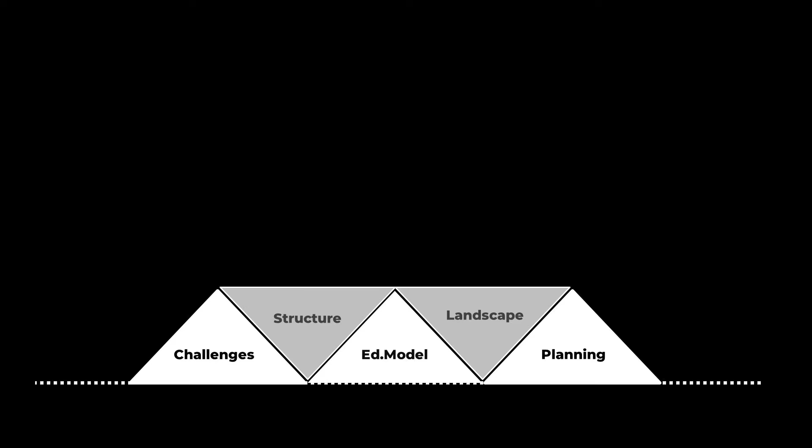Architect Samuel Barclay began with the design of this academy back in the year 2013, and the first building was started in 2015. So now the question lies, what was so special about its educational model and how has architecture contributed to its mission? So in today's case study, we would be focusing on various factors such as the design challenges, its unique educational model, the spatial planning, the structural arrangement, its landscape features, the different materials used, the climatic response, and finally the lessons that we need to learn from this case study. So without any further ado, let's get started.

And now coming to the design brief, which is the most challenging part in case of this design, which included firstly to design a sanctuary for learning. So basically a home away from home for young women from underprivileged households that could enable them to become great leaders. And second part of the brief included the formal requirements, which included a classroom, a library, some laboratories, kitchen and dining facilities, some dormitories, and some administrative offices. And lastly, above all, the major twist to the story lay in creating a cost-effective solution with a limited budget.

So now the most interesting part would be to see how this school has managed to uplift these girls to prepare them for the real world. And before starting on to the actual planning process, let's first understand the vision of the founders of its unique educational model, which has also helped the architect in picking up some nuances, and which was also one of the brilliant moves in involving the architect right from the envisioning phase, so that the client and the architect are in sync right from day one.

So coming to some key comparative points of the traditional model versus the Avasara model. So firstly, when it comes to the traditional educational model, the syllabus is mostly outdated, but in case of Avasara, it is progressive.

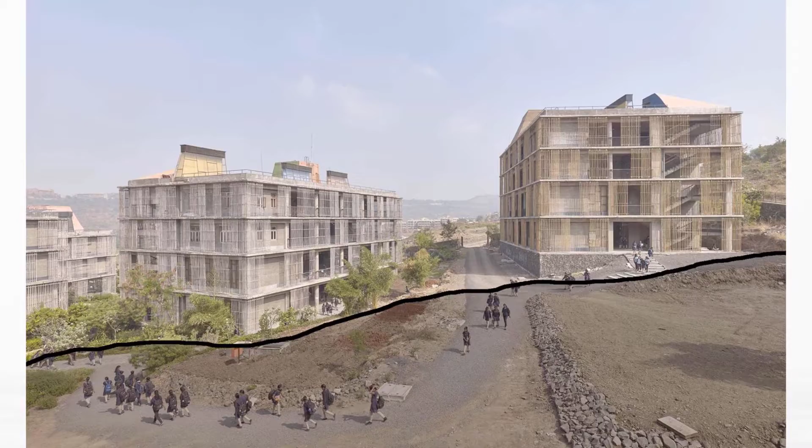And now coming to the planning of this campus. As the site is located in the green and peaceful valley of Lavale near Pune, it measures about 4.3 acres in total area. And the entire site has a total drop of about 18 meters from one end to another. And the entry to the campus is from the north side into a central courtyard formed by the buildings around it.

So in the entire planning of the campus, the two major decisions that have had a profound impact are, firstly, instead of having one large building, the entire campus is broken down into a series of 7 clusters which are arranged in such a fashion which creates a series of informal walkways, pathways, courtyards and gardens between these buildings. And these in-between spaces become spaces for social interaction between the peers, or a space for carrying out rituals or various performances, or merely as a playground or even growing food in the campus.

And the second most important call which was taken is that usually in most of the campuses, the residential zone is separated from the academic zone as it is used only in the night times. But in case of this campus, the residential dormitories are located above the academic function. So in all of the buildings, the lower 2 floors are for classrooms and the upper 2 floors are for dormitories and faculty residences.

And the most significant part about this move is that at any given point, each and every part of the campus is active, unlike the traditional planning where the residential zone is inactive in the daytime and the academic zone is inactive in the night time. And also the greatest intangible advantage about this zoning decision was that it helped in establishing strong bonds between the peers, which was one of the reasons before starting on to design this school.

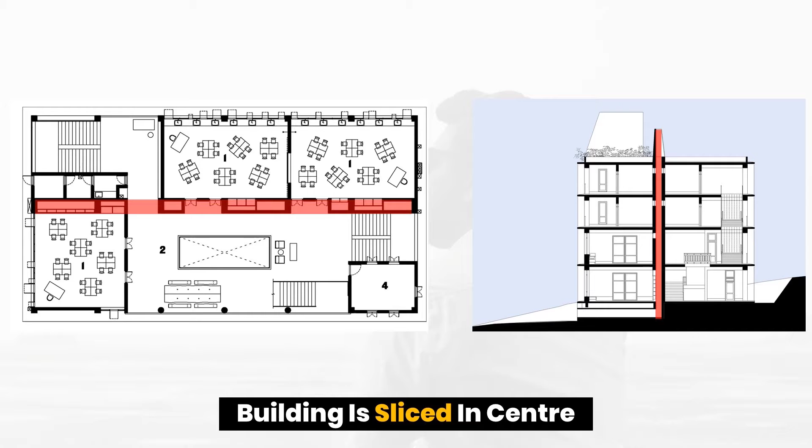And now let's see the micro planning of these buildings where its real simplicity lies. So the building is sliced right in the center to introduce a ventilation shaft that takes in cool air from the hume pipes and circulates it into the classroom to keep the overall environment cool. So the academic floor plate consists of classrooms, administrative offices, washrooms and the large atrium communal space in the center.

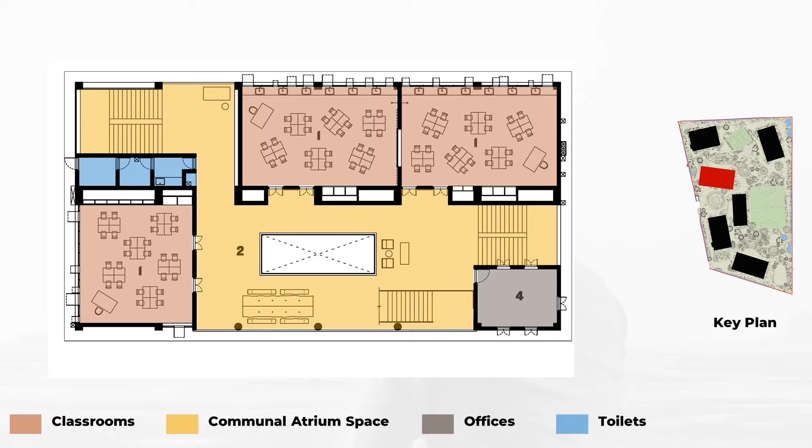So the classrooms are smartly arranged on the periphery to take advantage of the stunning views around, with the central open communal space which is used for informal learning, playing or even carrying out various discussions. And as the lower 2 floors are for academic facilities such as the library, the classroom or even the administrative facilities, the upper 2 floors are for dormitories and faculty residences which are surrounded by verandas on both the sides, which act as a shield against the harsh sun and the rain.

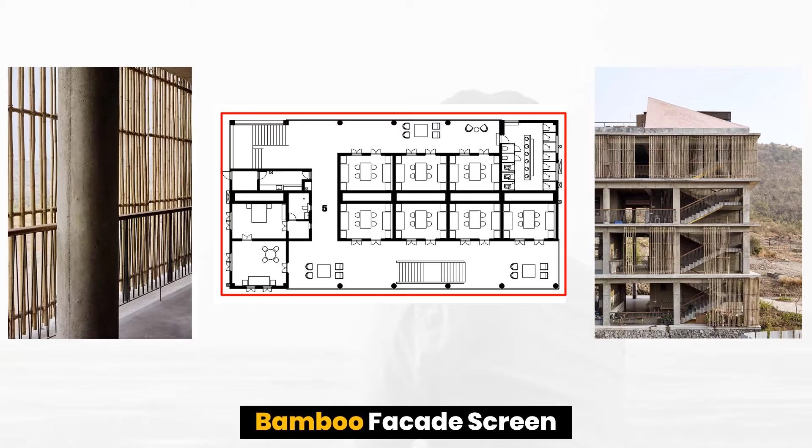So the verandas also act as public spaces for the girls to hang around and enjoy the stunning views of the surroundings or even watch their colleagues from other blocks. Therefore, these public and private spaces collectively intend to give a sense of familiarity and also a sense of intimacy to the young girls living and learning in the campus. And lastly, the entire facade is draped in bamboo screen which is prepared by the local craftsmen, which also protects against the harsh sun.

And also the most distinct feature about these buildings is the vibrant paints as against the muted tones of the bamboo and also the grey concrete for the walls. So the walls in the entire institute remain bare, showing their honest materiality, and only the ceilings are made to stand out by painting them with various vibrant pastel color shades by one of the famous artists, Malene Bach from Copenhagen.

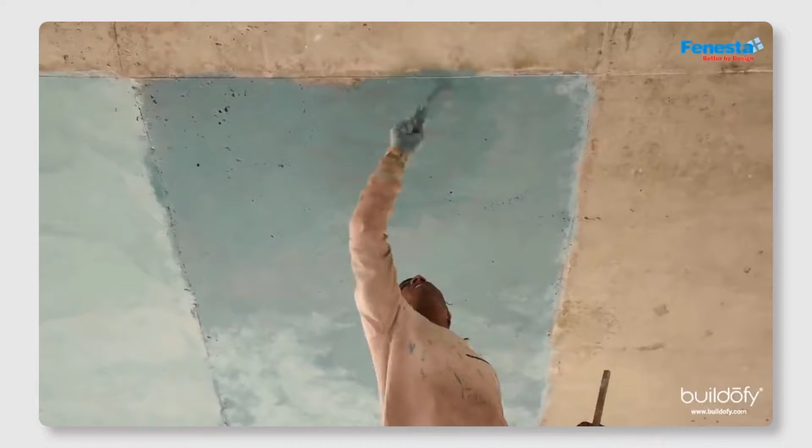So these ceiling colors really add vibrancy and delight to the space, which allows users to associate a space with a color and also acts as a wayfinding device. And now these simple steps taken into consideration during the planning have given rise to some of the amazing planning features that need to be highlighted, that have contributed in making this campus a great learning environment.

And now coming to the first advantage, that is the built versus the circulation ratio. So usually in most of the buildings, the circulation area is not more than 10% of the total area of that floor plate. But in this case, equal weightage is given to the circulation spaces as well as built classroom spaces, because here the circulation spaces are not merely circulation, but they have become social hangout spaces. So due to this move, an equal emphasis is given to learning inside as well as outside the classroom.

And the pockets in between the classrooms, that is the central circulation space, act as a learning space so that when students feel bored in the classroom, they can come out and sit in this space and learn. Therefore, the equal emphasis on the built versus the circulation ratio has really helped in establishing strong bonds between them.

And the second important feature is the building design being simple and identical. It offers enormous advantages such as easy construction, the cost of the construction is in control, there is less wastage of resources, and it also enables maximum flexibility. The quality of the project is controlled, and lastly the speed of construction, which is very crucial for any project.

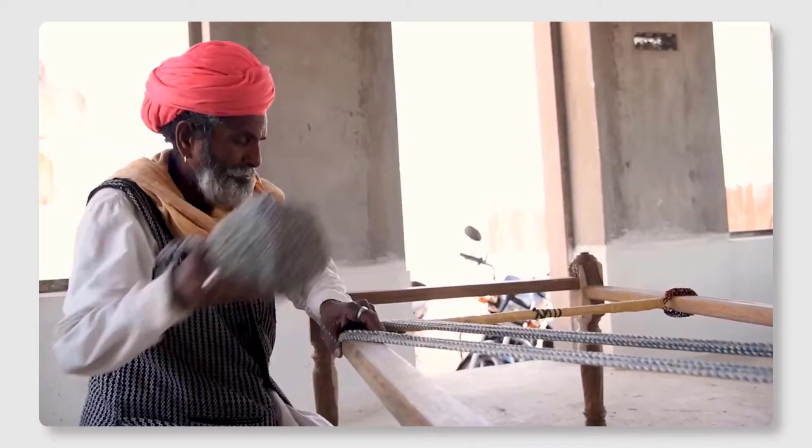And thirdly, the girls are staying away from their home, due to which they may feel homesick. And to address this issue, the materials and also the furniture, such as the old reclaimed wooden batten doors and windows, the mosaic flooring, and especially the charpai, are used to tone down the entire aura and give them a sense of familiarity and comfort, just like their home. So the girls living here do not get the feeling of living in a luxurious contemporary building with air conditioning all over, but the luxury and feel of traditional materials, which is an extension of their home.

And the fourth important feature is that here the staircase is not merely used as circulation but also as a social hangout space. Usually staircases are meant for circulation from one floor to another with a specific width, but in this case the width is slightly increased so that they are not only used for circulation but also become social hangout spaces where girls hang out and even sit around. And also changing the material of the staircase from solid concrete to steel has added lightness to the entire space, and most importantly it allows light to permeate through it.

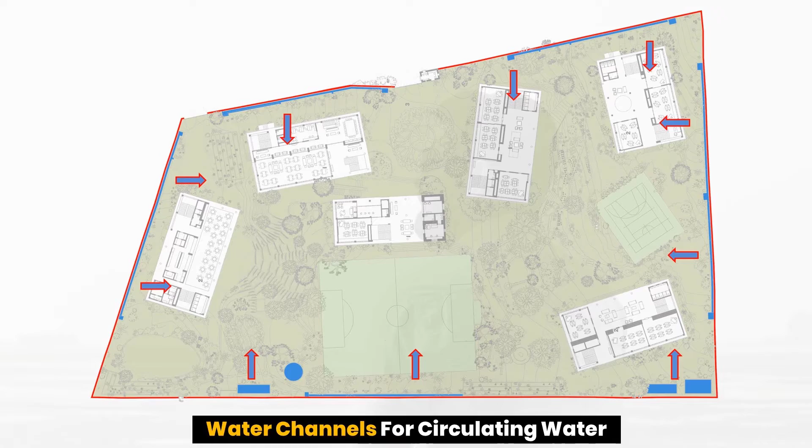Which implies that as the site is sloping, with an 18-meter drop from the higher end to the lower end, the water is collected at the higher end and transported through the entire site by means of channels located on the periphery of the entire landscape. So just by gravity, water is circulated from the higher end to the lower end. These simple steps and also the collaboration with the farmers have really helped them establish sustainability for this project. And this effort resulted in food and vegetables that people could grow and eat in the campus.

And they have also used a simple reed bed filtration system where all the grey water from the showers as well as the toilets gets reused and recycled for the entire landscape. And it goes way further than that, because as they are doing the landscaping work, they are also involving the school students by means of workshops, which teach them lessons of sustainability.

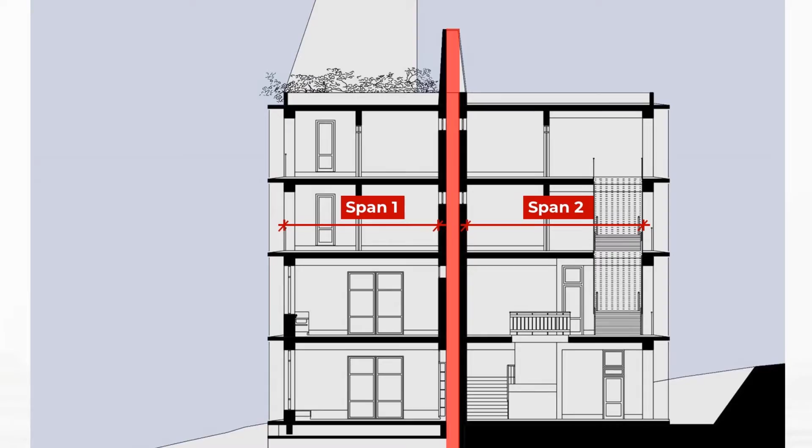And now coming to the structural arrangement of this building. So the real beauty of this building lies in the simplicity of its structure, the way it is articulated with simple reinforced concrete with typical column beam construction and post-tension slabs. And due to the post-tension slabs and most importantly slicing the building right in the center to introduce a central shaft reduces the overall spanning of the building. So therefore we get a clear column-free space, thereby reducing the cost and also the spans of RCC.

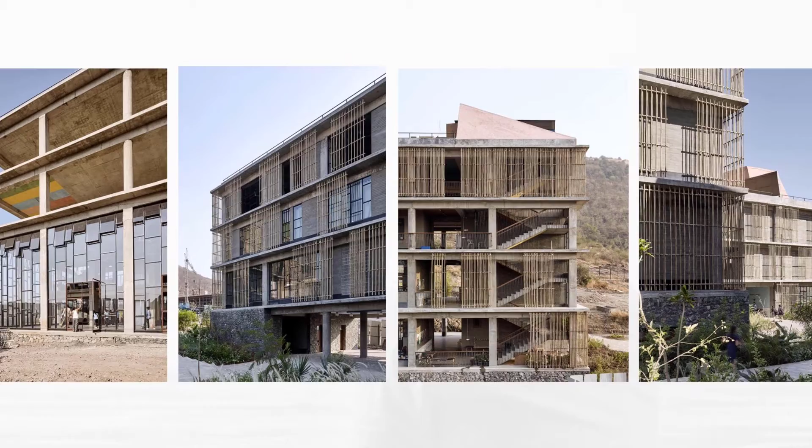So the central shaft performs a dual function of climate, which we'll talk in the climatic part, and also reducing the spans of RCC structure, which reduces the overall cost of RCC too. And lastly, the strong brutality of the concrete is shown by exposing the RCC floor lines that define the character of this building, with bamboo screens acting as an infill.

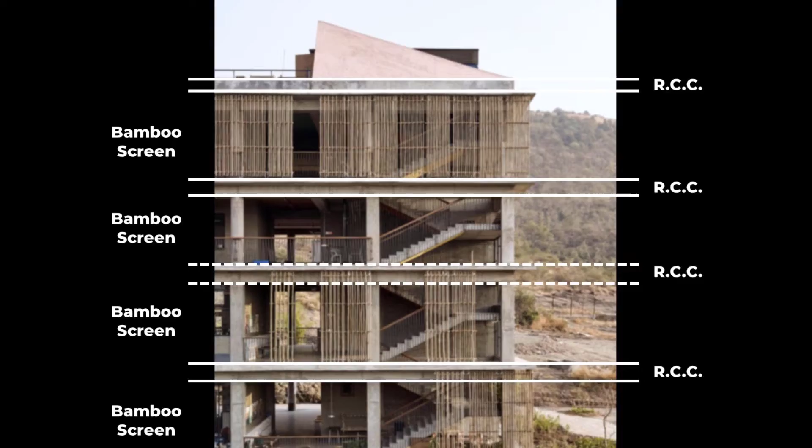And now let's look at the material palette, which is an amazing display of different materials through the entire campus. So given the budget constraints, the material choices were comparatively simple, and due to which concrete was chosen as the primary and the cheapest material, as it was to be used extensively all throughout the campus, even though it was not a very great environmental solution.

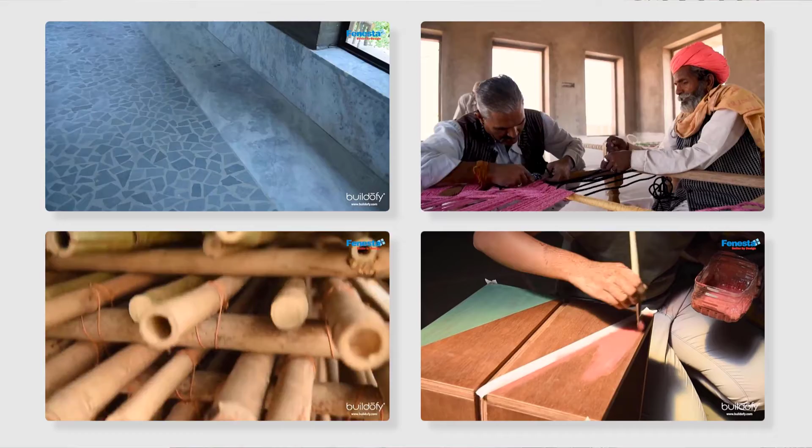And to balance this, the other materials that were chosen were completely recycled and reused, such as the old wooden batten doors and windows that were reclaimed from the old schools of Mumbai, or be it the waste from quarries of Rajasthan and Gujarat, or even the woven ropes from the industrial waste of Surat.

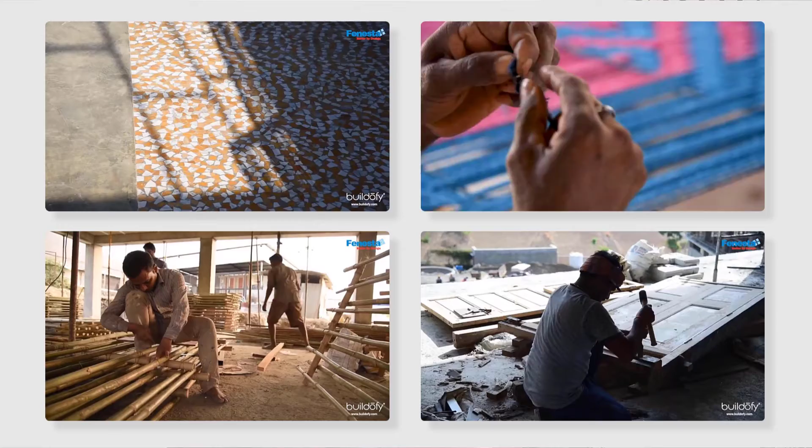So even though there was an extensive use of concrete all throughout the campus, some materials were chosen in order to balance or soften the entire concrete. Therefore, it is the real choice of materials that brings the aesthetic quality to the entire campus, which tends to merge with the beige-brown surroundings around.

And now coming to the climatic response, which is the heart of this building, and it would be incomplete without the consideration of this aspect. So I request you to pay very close attention to this aspect, as it is one of the most important ones in this entire building. So again, due to the budget constraints, the mechanical ventilation system was completely unaffordable, and due to which the climatic engineers came up with a simple solution of earth ducts and solar chimney. So let us first understand very carefully what it is all about.

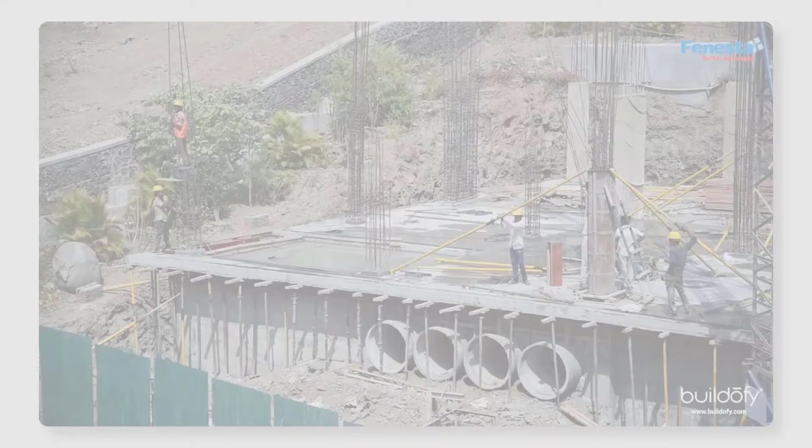So as we had seen in the planning also, the building is sliced right in the center to introduce a ventilation shaft which sucks out air through the solar chimneys on the terrace. So in the foundation below, there are these large hume pipes that draw in cool air, and this air is made even cooler by planting some plants in front of these pipes. So the cool air is drawn through these pipes and circulated inside the classrooms through the lower ends.

So in the entire campus, the cool air enters through the lower ends of the classrooms or even through the windows. And when the cool air is supplied in, it is necessary to suck out hot air. So for this purpose, openings are made on top of the classrooms and also the dormitories, which enter into the central duct. So when the hot air rises from the classrooms and other spaces, it enters the duct through these upper openings, and eventually it is sucked out through the solar chimneys on the terrace.

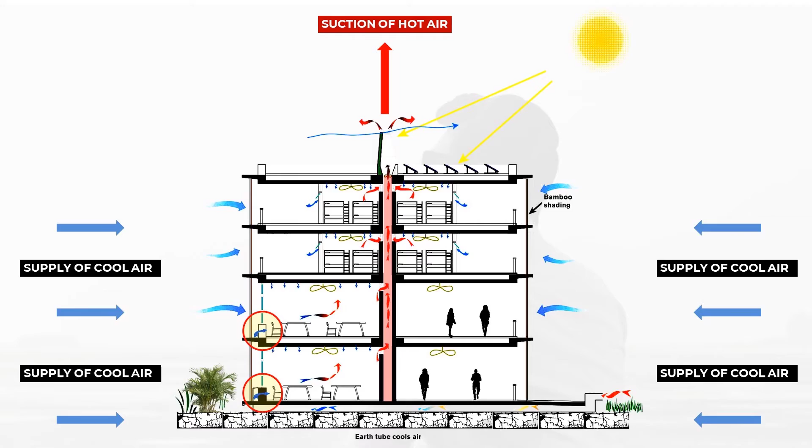And the most important care that is taken, in spite of using concrete for the floors, which emits a lot of heat, the use of marble mosaics controls that emission of heat from the floors. So in this way, the supply of cool air from the ducts below and the suction of hot air through the solar chimney above creates a comfortable environment inside. And the solar water heaters on the terrace provide hot water for showers, and PV panels supply electricity for ceiling fans and electric lighting in the building.

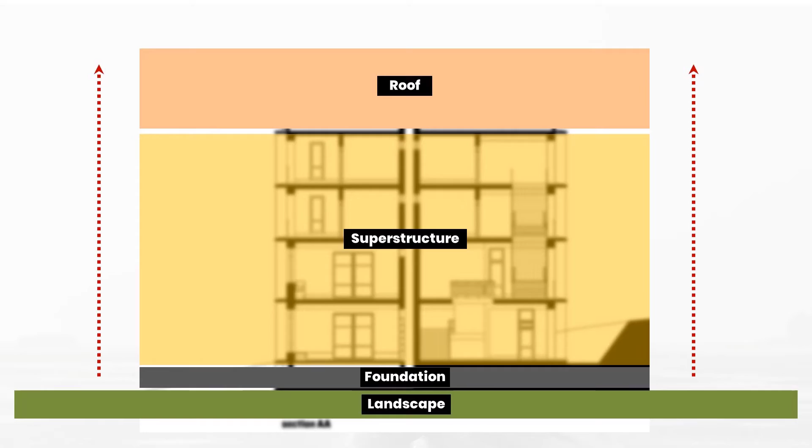And all of these simple steps taken have resulted in some mind-boggling numbers, which state that just by eliminating the mechanical systems, the overall construction cost of the building has reduced by 7%, thereby reducing the overall energy cost by almost 80% due to these passive design strategies. So in spite of having high ambitions and moderate budget, the building successfully creates a comfortable environment without the use of mechanical systems despite the warm and humid climate. So right from the landscape to the foundation to the superstructure and ultimately to the roof of the building, they are completely net zero energy buildings.

And now coming to the last and the most important part of this building, that is, what are the lessons that we need to take back from this iconic case study.

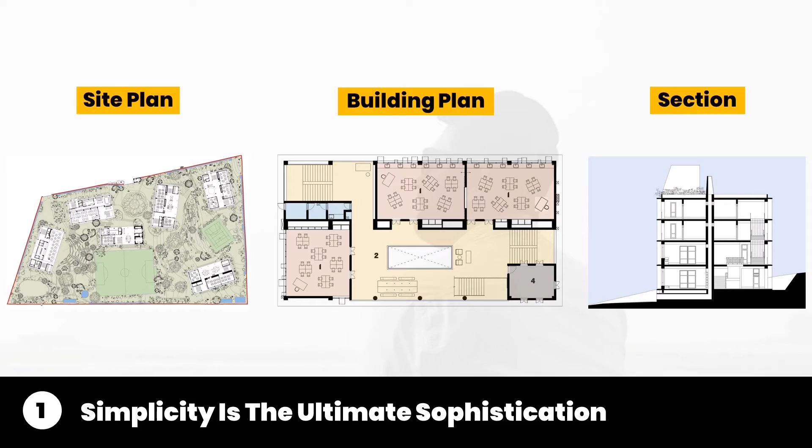So the first lesson that it teaches us is of simplicity. When going through the entire study of this building, the only thing that comes to mind is the simplicity, be it in the site planning or even the micro planning of each of the blocks, or even for that matter the sectional part of this building. Hence this proves that you don't always need out-of-the-box ideas or even large budgets to create an impact in the environment that mere simplicity can.

And its simplicity does not stop here, but the building plan also has the flexibility to convert it into a museum or an exhibition or even a training center for that matter, to expand through its maximum flexibility.

And the second important lesson is the power of collaboration. As the building is a continuous work in progress, an attempt is made at involving the girls in the construction as well as the landscaping process to teach them lessons of integrity, efficient use of resources, and lastly working in groups. So the building itself teaches the students, which connects back to the real motto of the founder of teaching them real-time problem solving. And this simple attempt will have a huge impact, creating long-term ripple effects.

And thirdly, it is a great cost-effective solution. What happens most of the time when working on a project with a tight budget is that either the quality of construction or the aesthetic look or even the overall impact might get affected. But this project has truly proved that ultimately design is what matters at the end of the day to break free from all the constraints. So this is a prime example of a building that can solve a problem efficiently as well as effectively.

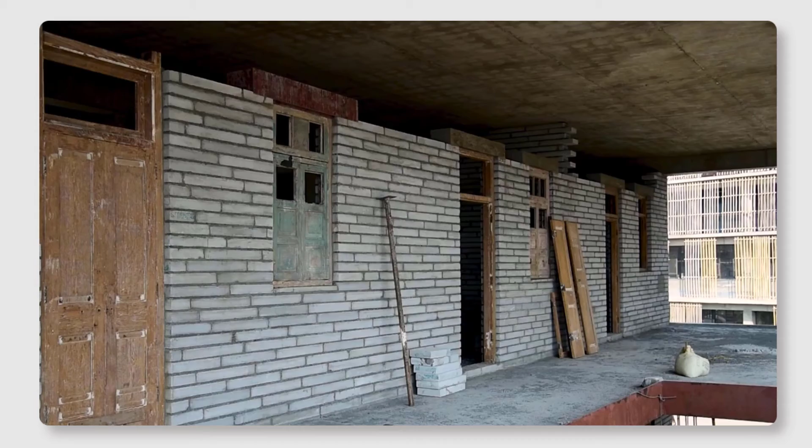So holistically, when you look at the entire building, it is an overall package of visually appealing plus climatically sensitive plus cost-effective solution. And fourthly, it teaches us how to make the best use of waste materials, as all the materials used in this building are completely recycled and reused only at the cost of transportation, be it the waste marble from tile shops and quarries of Rajasthan to create floors which brought in their own varying colors, or walls in fly ash bricks from industrial waste, or doors and windows from an old school in Bombay, to the plastic or fabric waste from local industries in Surat.

And the most important takeaway from this is that reclaimed materials tend to look more beautiful than the brand new ones. So before going on to the next lesson, just imagine a client comes to you with some strange requirements saying that we want to have a school and the girls learning in this school would be the next change makers. And also the school will equip them with strong leadership and problem solving skills, where the learning will not only be through the teachers but also through their friends. And ultimately it will be a residential school where the girls would be staying away from their home, so they should not feel a sense of discomfort in this campus, apart from the formal requirements of a typical classroom or a library or even some administrative offices.

And the first burning question which will come to your mind is, can architecture really solve this problem? And if yes, how can architecture solve these? Well, there's an answer to that too, and that's where the brilliance of the architect in this case lies. So the three major decisions that have managed to solve these problems are, firstly, the classroom furniture arrangement, which enables the students to sit in groups and discuss the problems that are taught by the teachers.

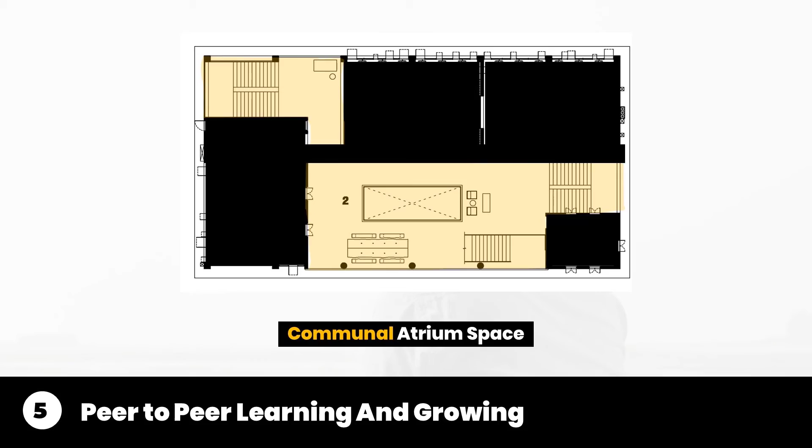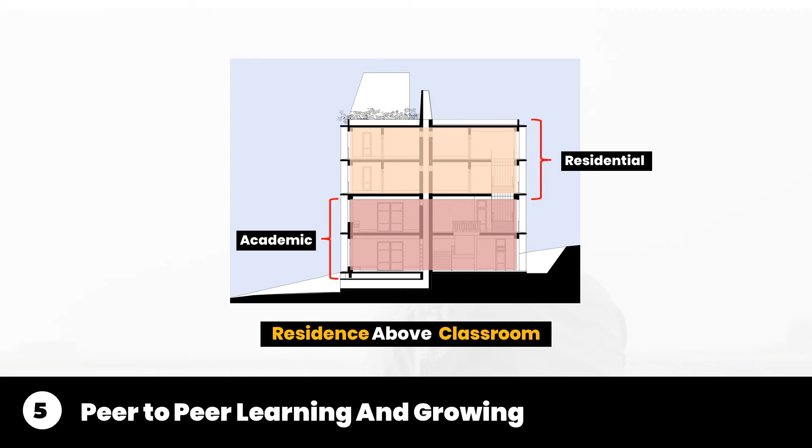And secondly, the communal atrium space ratio. Here the circulation spaces are not only looked upon as circulation but also as learning spaces where the students can come out of the class when they feel bored in the class. And thirdly is the residence above classroom arrangement, where the girls live like a family and not only as classmates. It's very earthy here, like it feels like home. Nothing is very artificial and superficial, but everything is natural and reused and recycled. And all of these simple steps taken have enabled strong social peer-to-peer learning bonds.

So just to sum it all up in short, this building is not merely a building, but it is an experience that focuses more on impact over commerce.